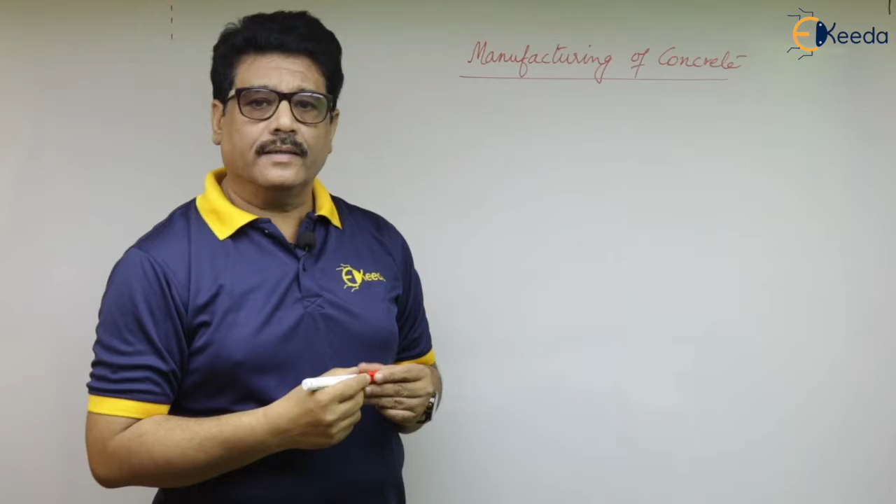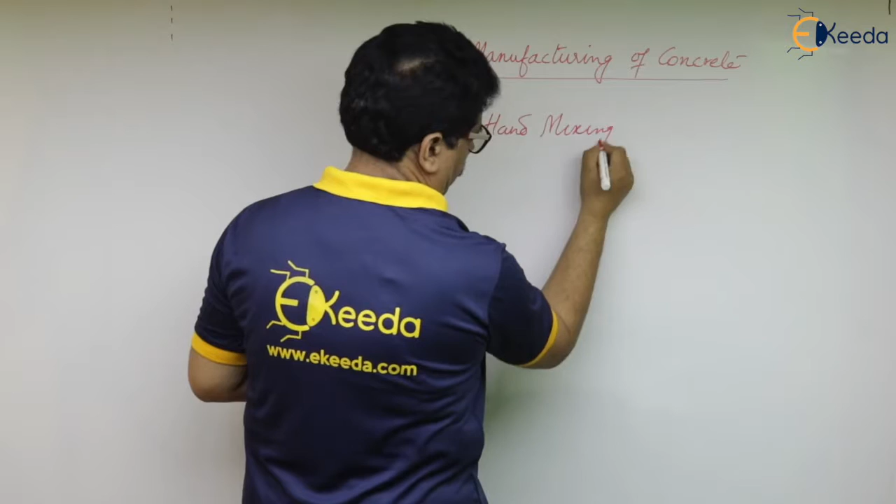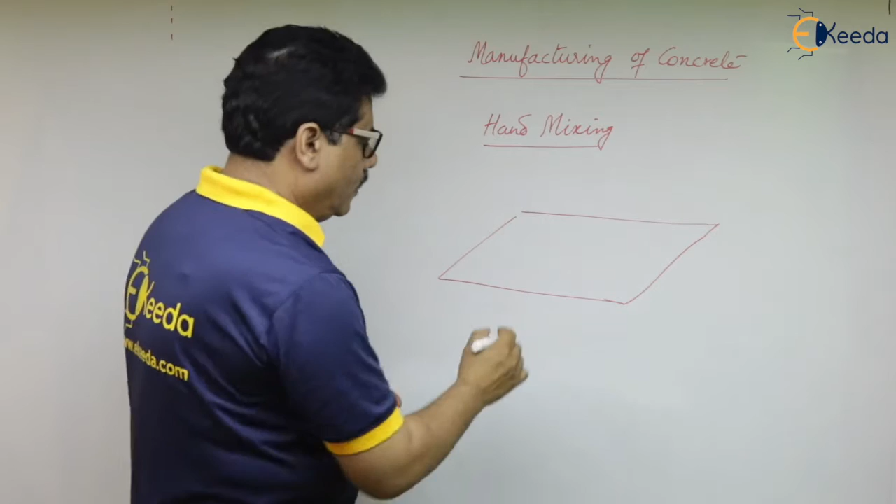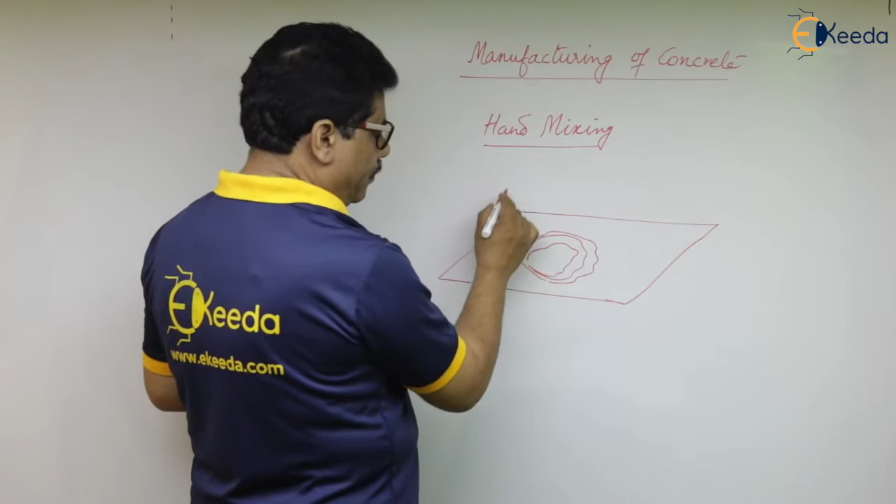Now we will discuss the manufacturing process of concrete. If we see the historic development of concrete technology, in the early days concrete was mixed with hands manually, and that is called hand mixing, in which suppose there is a platform or a steel plate on which we can pour the aggregates.

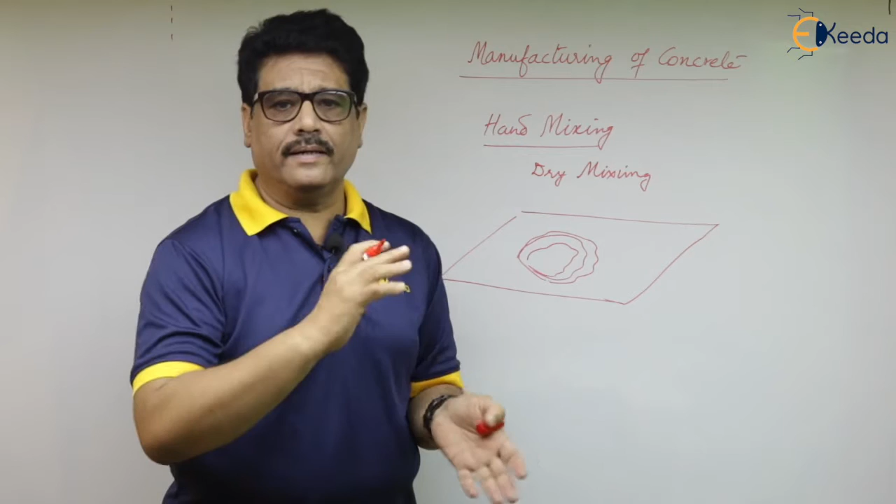In the first place it is dry mixing. After guaranteeing that cement, aggregates, sand are all homogeneously mixed, we can pour the quantity of water. Then again, once, twice, upside down mixing, that concrete mass was prepared in the early days.

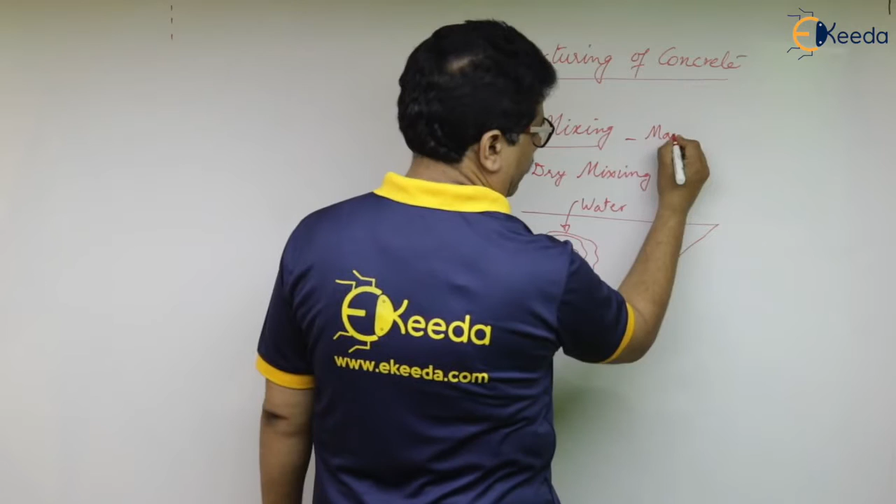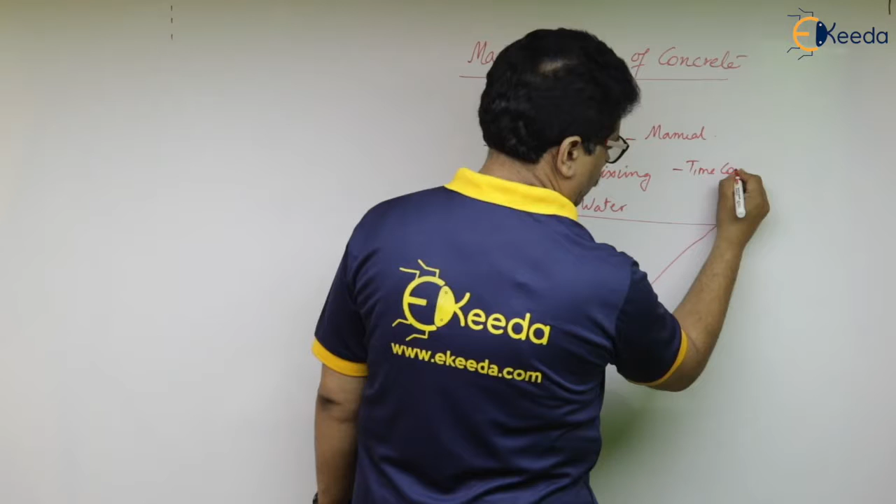So hand mixing, or we can call manual mixing, was time consuming. Again, laborers who are not habituated in mixing concrete with hands, if they work on that, the quality again was an issue. Expertise or people who had a habit of continuously mixing with hands gave better results as far as quality of concrete was concerned. But a newcomer would cause a subjective change in quality, and hence we should not expect uniformity of quality in that case.

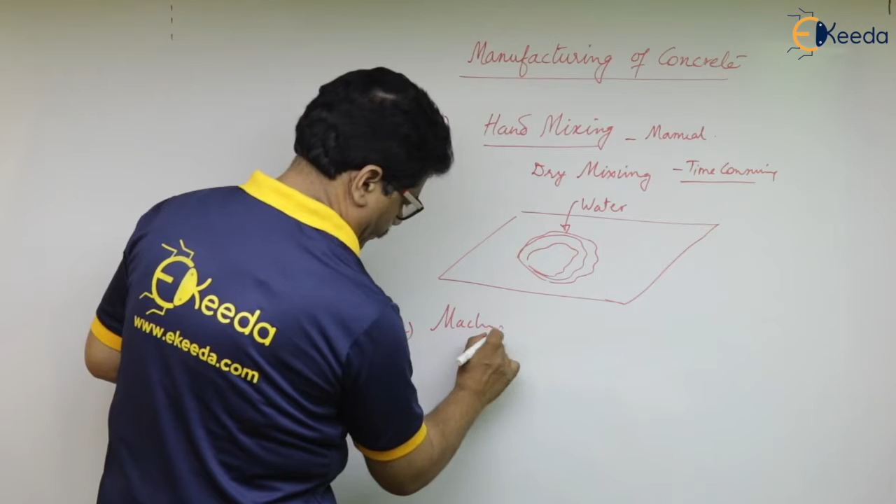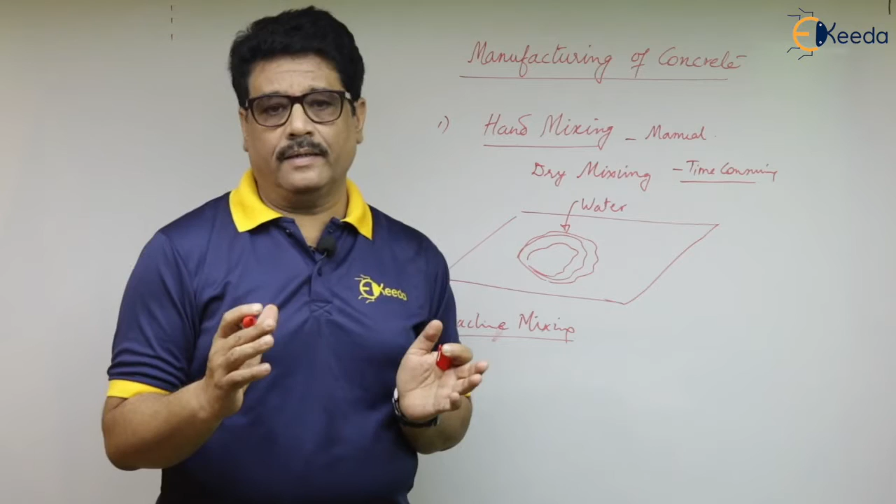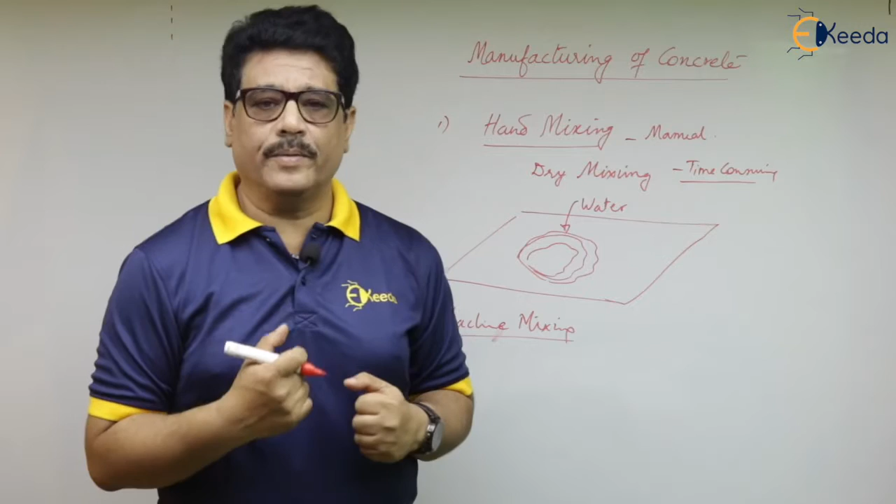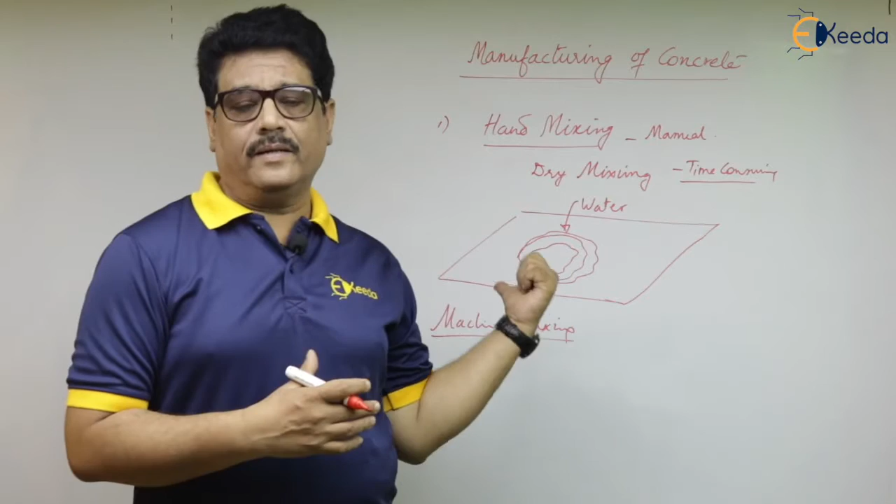Slowly this was replaced by machine mixing. In the beginning there were small mixers. There are types of mixers: tilting, non-tilting, with rotating drums, electricity operated or diesel operated. We have so many varieties of mixers. Machine mixing is relatively a better quality giving technique of making concrete.

Nowadays what is more practiced is ready mixed concrete, in which there are rotary mixers, and the quantities of concrete ingredients like cement, aggregates, water are all computerized. Automatically they are fed to the mixing. Therefore, the quantities as per the design mix have to be taken.

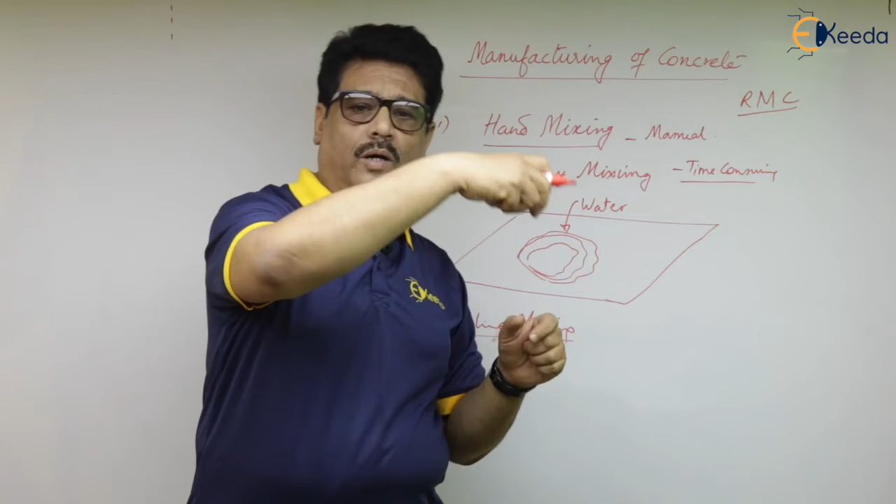In the case of hand mixing, ingredients were taken manually. In the case of machine mixing also, they were poured into the hopper of the mixer manually. There are two methods: one is weigh batching and another is volume batching.

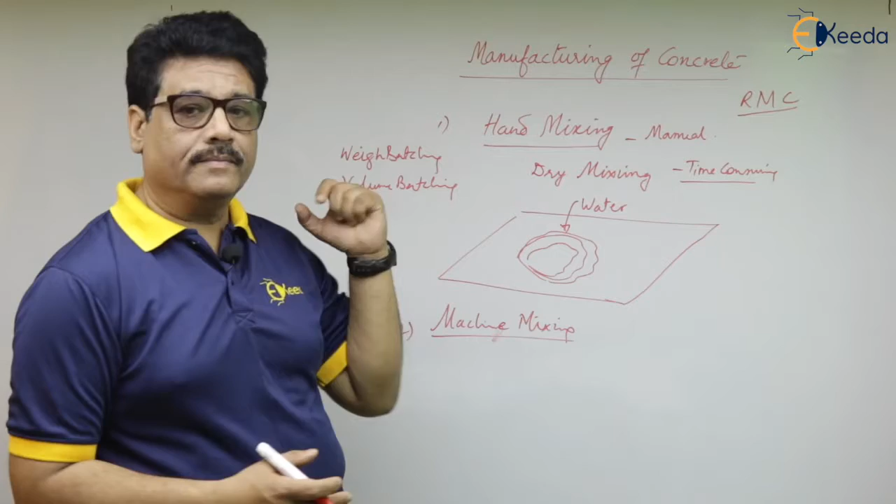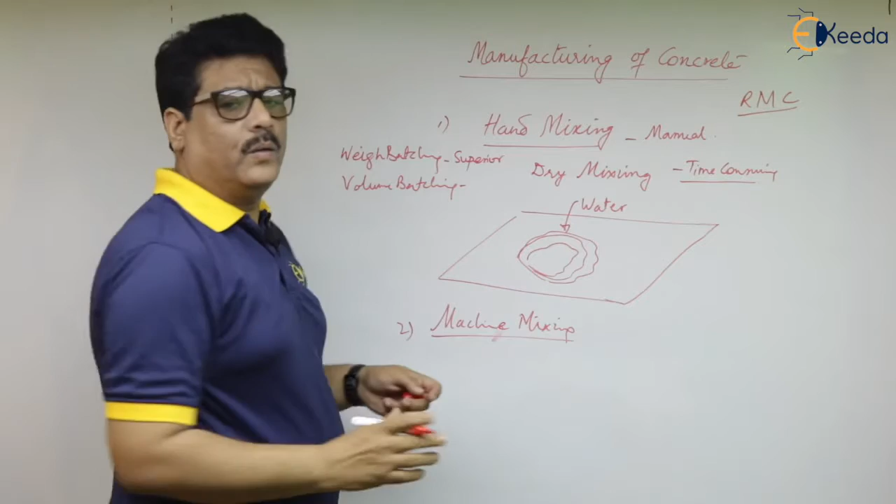Taking out the quantities of cement, aggregates, fine and coarse on the basis of weight is called weigh batching. On the basis of volume, suppose we are mixing them, that is called volume batching. Definitely weigh batching is superior. Volume batching is okay, but in case of bulking of sand, this volume batching will be erroneous, and therefore we have to go for weigh batching.

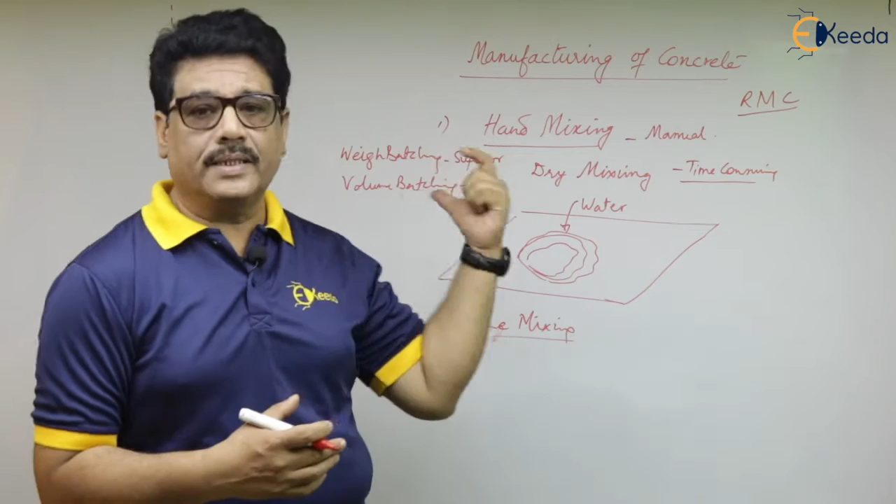In the ready mix plants now, where the concrete is made with the help of computerized controlled activities, that is the best way, and after that it is given to the transit mixer, which is always revolving. It also keeps on mixing till the site is reached.

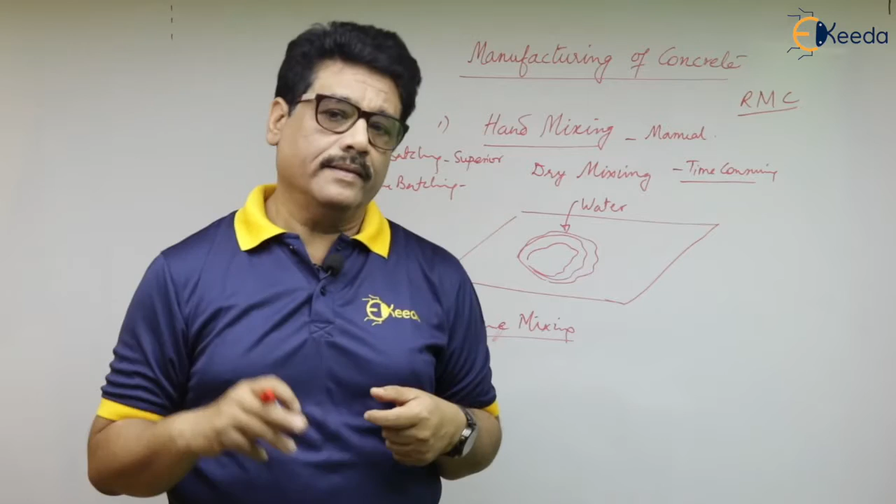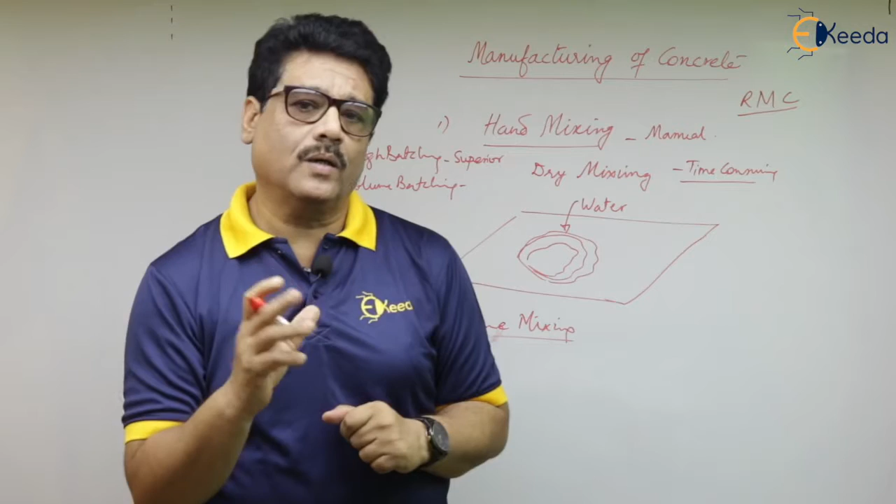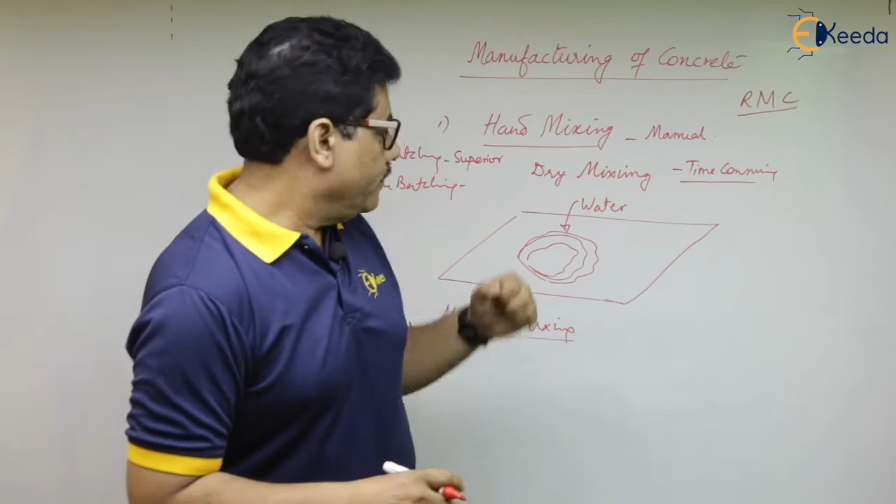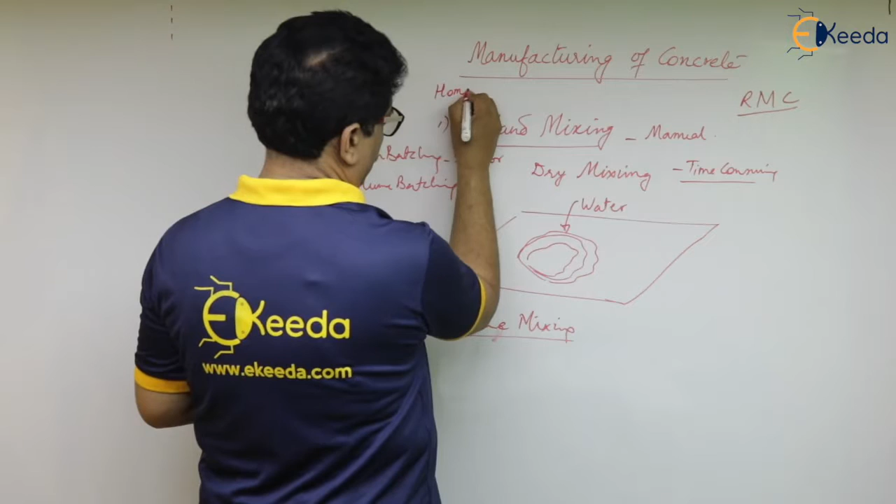So manufacturing of concrete is always subject to different parameters. The resultant concrete of the desired quality can only be had if proper control is exercised on all these things. So it is the duty of the quality control engineer on the site to assure weigh batching of concrete, dry mixing, maintaining of water cement ratio, making the number of turns or revolutions to the mixer, so that a proper homogeneous mix results. So homogeneous mix is also very important, which will have the same properties at any portion of that volume.

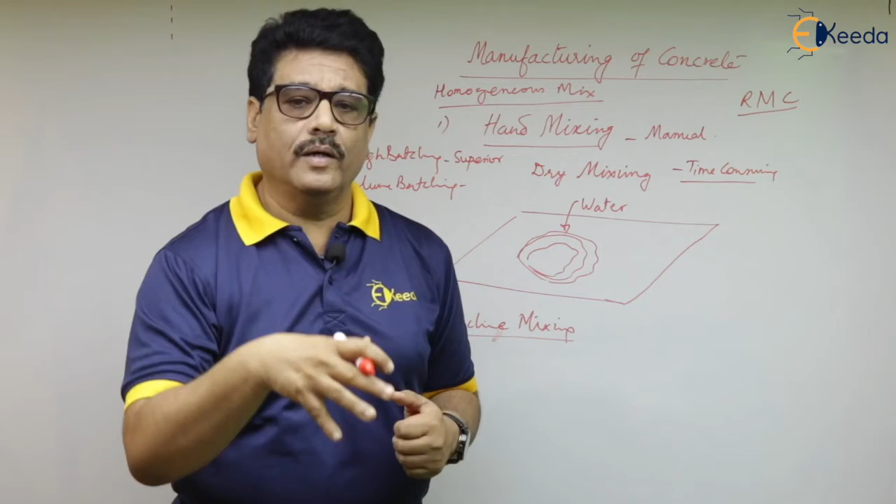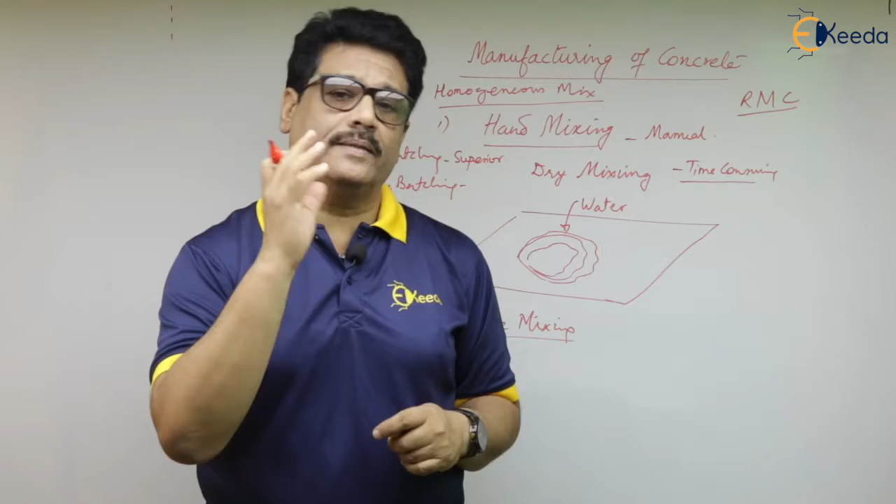Again, after some time, suppose today's work is over and the casting of the slab is still going on. Tomorrow again laborers come, and they again prepare a different mix. Now the guarantee of the mix quality prepared yesterday and the one going to be prepared today, both these qualities should be 100% matched. Now this is very difficult to attain, but by practice, by control of supervision, we can assure that this can take place.

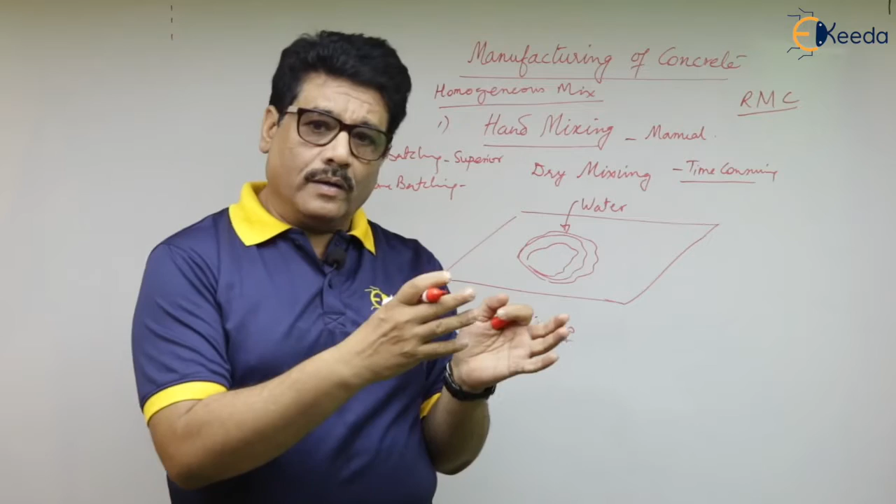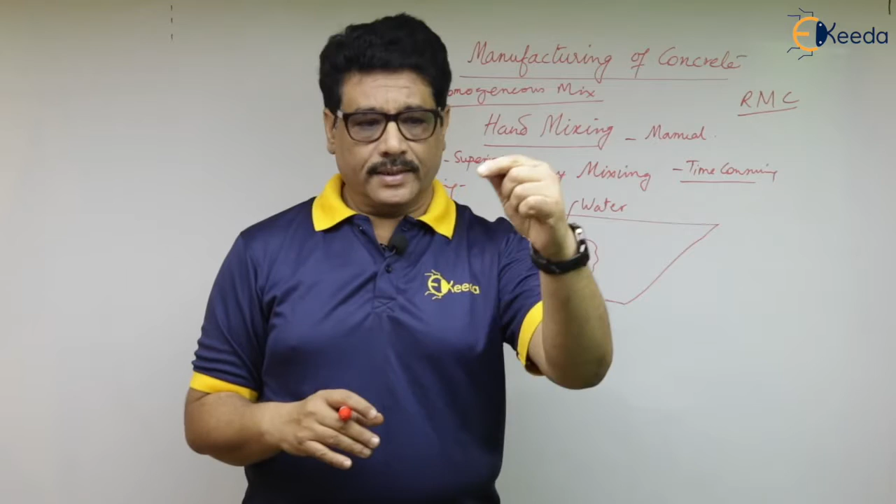And therefore concrete technology is a very complicated subject. Executing that on the site, the engineer in charge really doesn't know what went wrong and what went right if he gets a bad result and a very good result. In both cases, he may not be able to pinpoint that he has done this right but that went wrong, or done this wrong but that has gone right.

And therefore this is always a thing to gain experience about. Only then can we say that by experience, the concrete engineer gains a lot of learning. Even if we study theoretically the quality of aggregates, quality of cement, specifications of cement, strict control of water cement ratio, mixing time, number of revolutions, so many things, if we see and adhere to it, still we can have variations in the quality of concrete.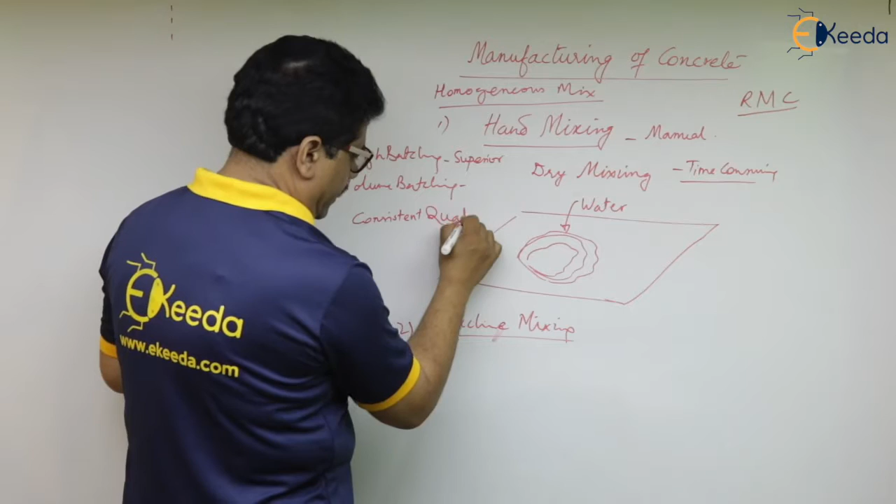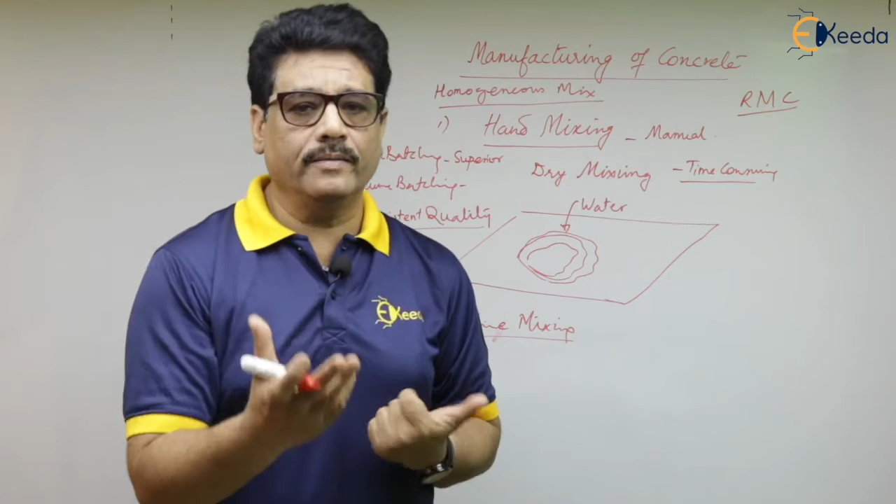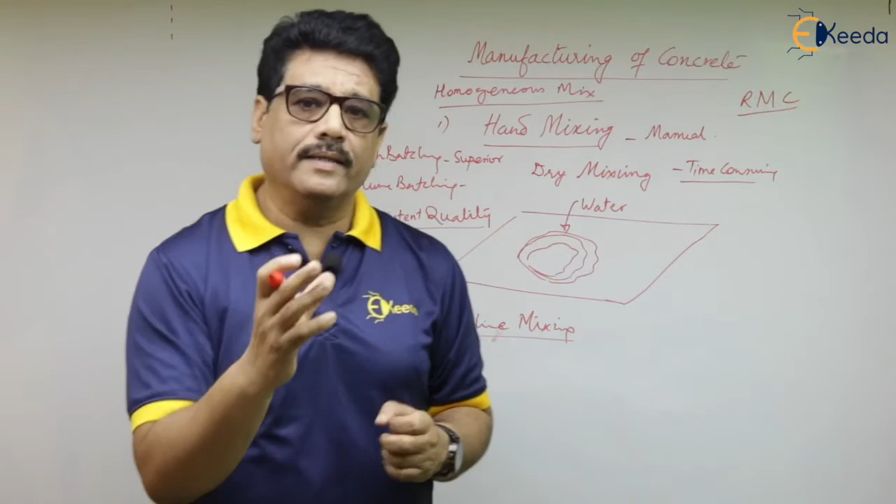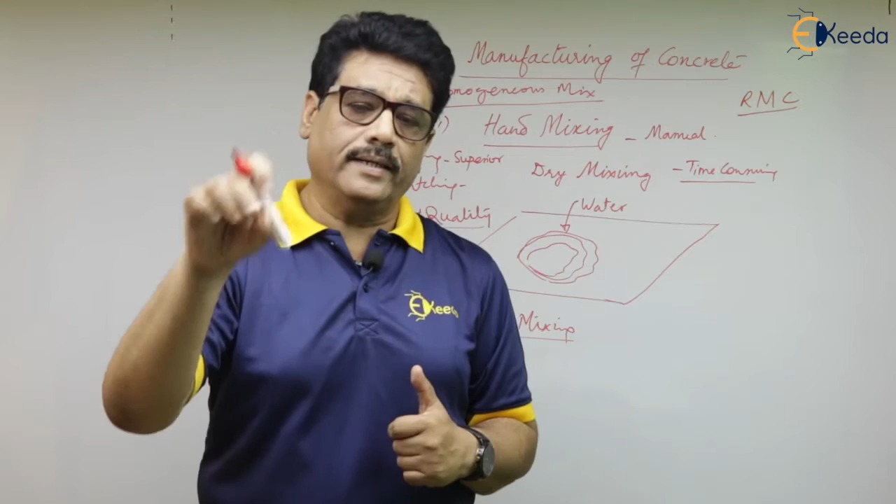And therefore, to have a consistency in quality, or a consistent quality of concrete, how do we check it? By frequent testing of concrete cubes. If M10, M15, M20 or M25 grade of concrete is desired, by frequent testing of cubes cast at the site and tested at the 3rd, 7th, 15th, 21st, or 28th day, we can get the results, and then we can say the quality of concrete is consistent if the number of cubes tested give results in the same range, at least not exactly the same, but with very marginal variation. In that case we can say the quality is consistent.